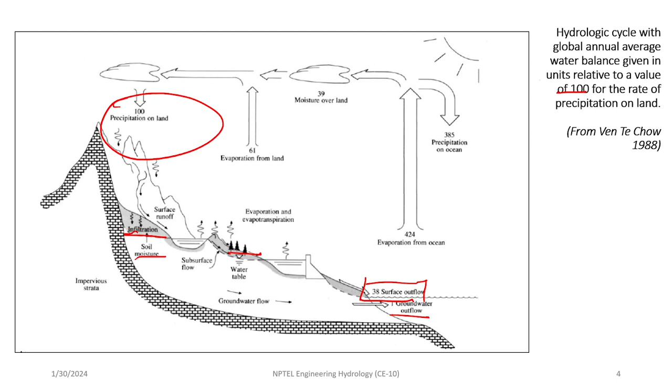Okay, fantastic. There is one more person I want to check, is he getting the things or not? I guess... Balamurgan, are you here? I think you are saying something, but your voice is not reaching me. You can type if it is possible. Okay, why is your voice not coming? I want to be more comfortable if we are interacting more. Not an issue if it is not working right now.

Okay, I'm coming back to my presentation again.

Ashish, can you tell me once again, is it visible to you? Screen is visible to you? Yes, yes, it's visible. Okay, okay.

So you told me that 61 units are going, which is getting evaporated. Yes. So evaporation is one important thing that we have to learn, that evaporation could be from a land surface, and another, it could be from the plants also. But when evaporation is taking place from the plants, then we come up with one more hydrological term known as transpiration.

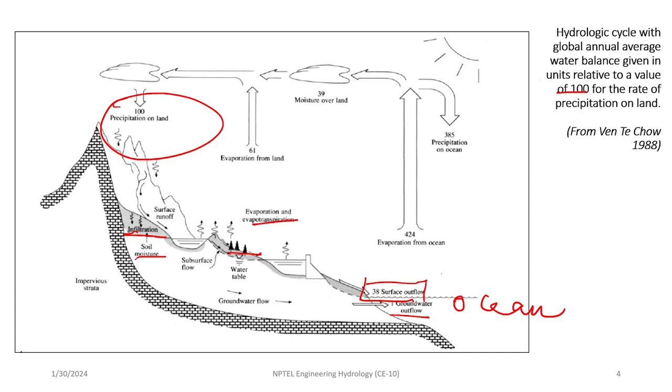These processes are very important in order to model the entire hydrologic system. Now I'm moving ahead, so one more tabular estimate is there. It is also from UNESCO 1978.

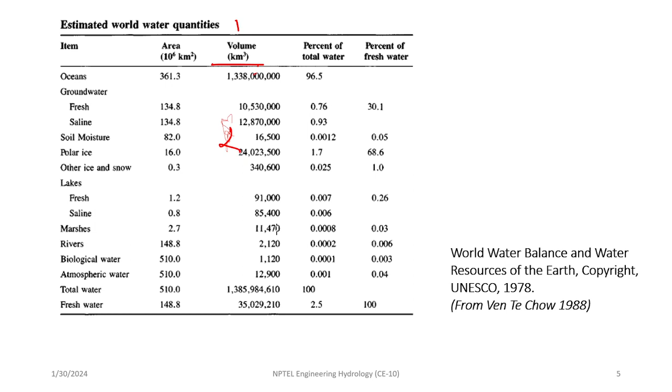So volume is having another importance in this. When we will be talking about residence time, we will be taking this volume as an input parameter for computing the residence time. I'm moving ahead. I hope you are getting the basic distribution. This is a basic understanding.

Now coming to the major part. In this entire discussion, we will be focusing on questions based on different topics, and simultaneously we will be discussing the basic literature and concepts behind this. So before going ahead, whatever question you are looking at, you should first reply to them, and then based on that we will go ahead.

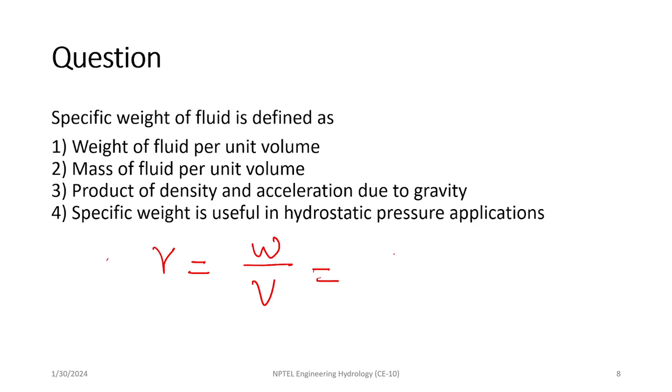So this is a basic understanding, you may have gone through the lectures already. A specific weight is represented by the gamma symbol. So gamma is equal to... it is saying that gamma is always a ratio of weight of the fluid per unit volume. Weight of the fluid, from basic physics, W is always equal to mg, so gamma equals mg divided by v.

If we take this m and v part together, we will come up with another term — can you tell me what it's called? It is called density, yes, mass density, we will say. So it is coming as rho, and the remaining part will be g. So weight of the fluid in the first option, you can see, weight of the fluid per unit volume. The mass of the fluid per unit volume will be density only, that is mass density. Then the third option: product of density and acceleration due to gravity.

One more thing is that specific weight is useful for hydrostatic pressure application. There is a principle that when water is moving, it causes some kind of pressure. You might have felt this when taking a dip in water, maybe a river or a sea. There is continuous pressure building, and this pressure always has a triangular distribution. It is always equal to P equal to unit weight, that is gamma into volume.

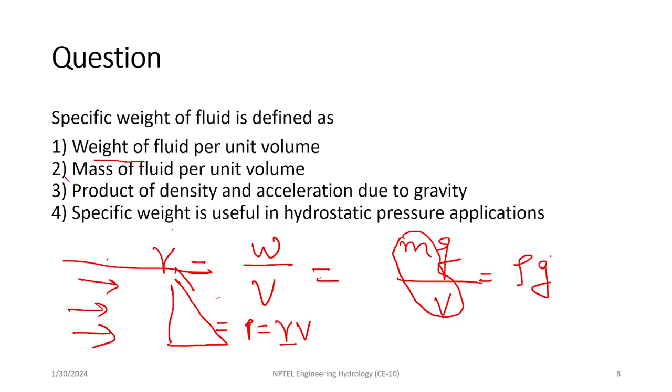So the first option is clear, the third option is clear, and the fourth option is clear, right? Okay, so whatever we had discussed so far, this is the basic difference between mass density and specific weight. You can see that mass per unit volume of fluid is defined as mass density of fluid.

The unit is clear, I think, not an issue. And for specific weight, we can see it is weight per unit volume, and the unit is somewhat different, Newton. Can you figure out why it is coming in Newton? Because gravity is acting, no? Yes, right, gravity is acting there, so it combinedly comes under this as a force.

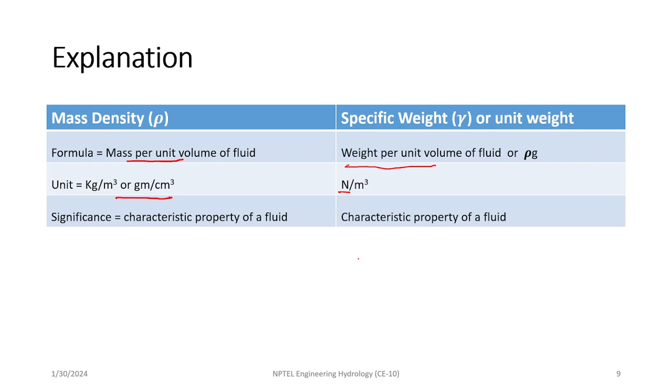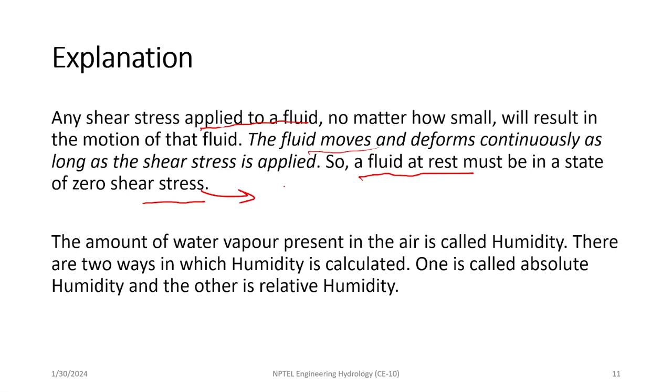What is shear stress? We have to note down that it is just a ratio of force per unit area, this is stress. And why is it called shear stress? It is because this force acts tangentially to a fluid or any body which is submerged inside it. Then only shear stress will act, so this force will be a tangential one.

The important thing is, when the fluid is at rest, it will have zero shear stress. Otherwise, if there is a small amount of stress applied, then definitely there will be some movement on the water or any other fluid, like oil or water, anything.

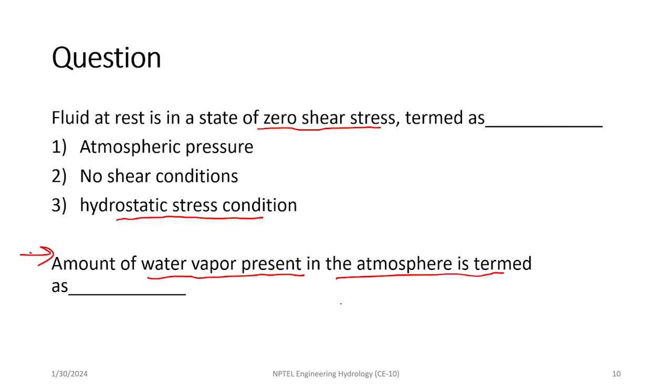Now coming to the second question: amount of water vapor present in the atmosphere is termed as? Any idea? Yeah, it's humidity. Fantastic, good one. So it's humidity, and this humidity is dependent on the temperature.

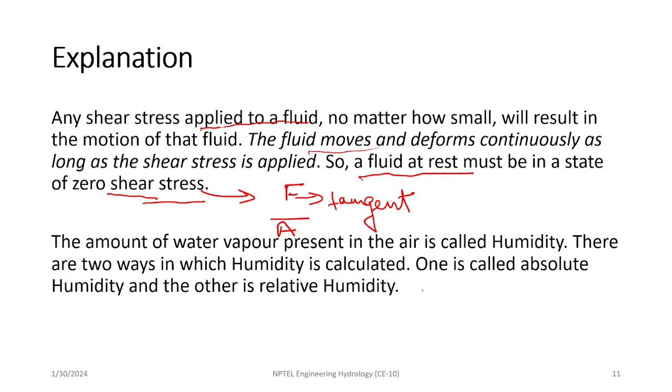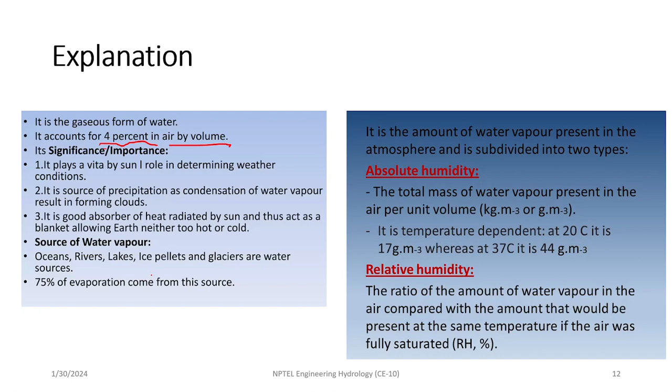Based on that, it can be divided into absolute humidity as well as relative humidity. There are some facts based on this: humidity always accounts for 4% in the air by volume. The major sources of humidity basically arise in terms of water vapor only, so 75% of it will be contributed from evaporation. Now coming to the next question, a different aspect of water across the earth.

This question - are you getting this? Different aspects of water across the earth can be explained with the help of a complex cycle, termed as... There should not be any confusion. Yes, water cycle. Good one. It should be a water cycle only.

Then another question is this. Let me erase this. Okay, other question is there: loss of water into the atmosphere through the leaves and the stem of the plant is termed as.

We just discussed - transpiration. Fantastic, good one. These are the basic concepts only. We are just going through the basic concepts. Later stage we will be going into the major questions, so don't feel that they are very silly. No issue.

So surface tension results from the forces, dash forces, within the liquid.

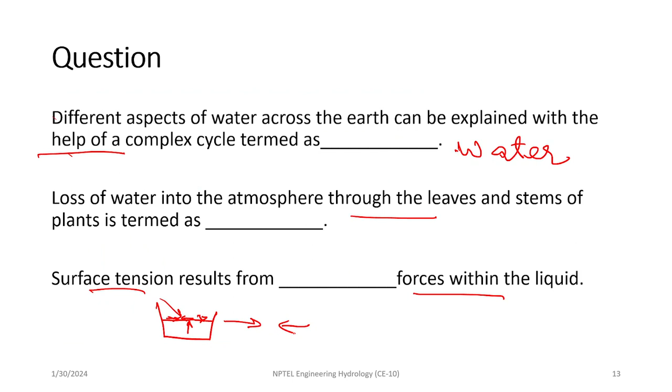It will be in vertical direction only, against the gravity. But we are talking about the horizontal force, acting on the horizontal surface of the water. So we can see the explanation for the above two questions. There is a water cycle - first one is the water cycle. Then there is a transpiration process.

Whatever water has been taken by the plants gets evaporated, known as the transpiration process. Now coming to the third question about surface tension: the surface tension of a liquid results from an imbalance of intermolecular attractive forces - the cohesive force between the molecules. You know about this cohesive force, cohesive and adhesive force.

Forces which are getting generated on this - this is an interface. We are talking about this force.

From this particular figure, you can see that there are certain water molecules which are already submerged. They are having a net force as 0, but whatever water molecules are at this interface, they are making a net downward force F. Because of that only there is surface tension acting on this surface. Got the point or not?

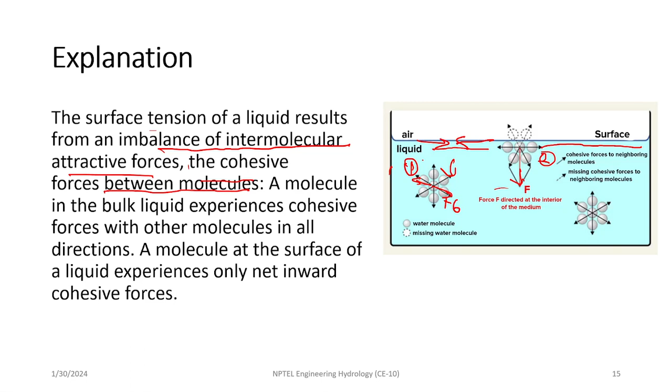Now the next question is: the process by which water changes into water vapor in the hydrosphere is evaporation. Fantastic, so it will be evaporation only.

Now the next question is: density of the fluid is defined as mass per volume. Good, fantastic. So mass of the fluid per unit volume - this will be the right answer.

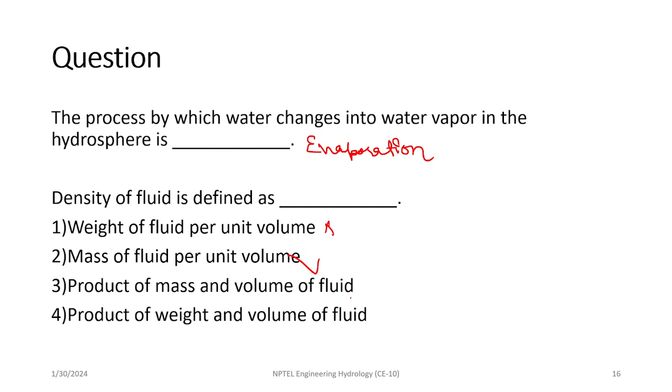You can also check whether the other options are right or wrong. The first one is wrong: weight of the fluid per unit volume. Product of mass and volume of the fluid - will it be density? No, no. And product of weight and volume of the fluid - no, no. Okay, good.

So the next question is: capillarity results from. Have you heard of this capillarity word? Yes. Where have you heard it? I've studied somewhere, I know this part. Fantastic, good, so definitely you might have studied it in some water-related part of your physics, maybe in 10th or 11th class. So definitely capillarity - anti-gravity, I think it's opposite to gravity.

Capillary action - exactly. So there are options: it arises from the combination of cohesion and adhesive forces, due to cohesive force only, due to adhesive force only, or maybe due to surface tension force. It's due to surface tension.

Okay, let's see the example. I guess it's not only surface tension - there are some other forces also acting, because surface tension can't define it properly. Capillarity, from my understanding, is always like the movement of water in the negative pressure direction. I can tell you an example: whenever plant roots take water, they take it through capillary action only, and that process is basically explained in terms of negative pressure acting, based on which they carry water from soil moisture to their roots or shoots.

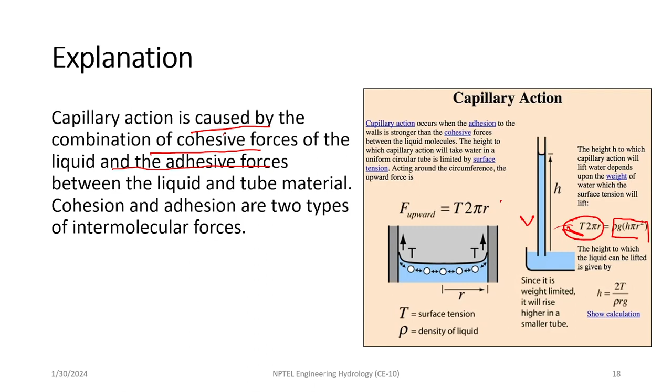Shall we move ahead? Yes, very good, okay. Now I guess one hour is already completed, but if you're not tired we can continue. We're comfortable. I want to know the other person. Sure, wait a minute.

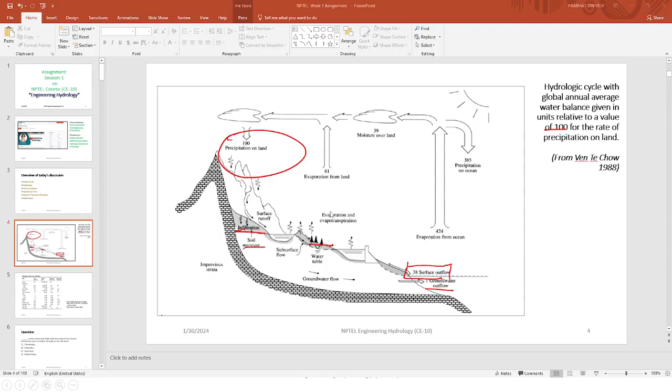Okay, he is replying. Sorry, Bala Murugan. Whenever the screen is in a presentable mode, I can't see the messages. Okay, that's fantastic that you are replying. Good to know.

Maybe this is the first session, so only two people are here with me. But definitely, as we go into detail with further concepts, we will have more fun and it will be more interesting to know the concepts. I hope next week when we meet, more people will be there. As far as I went through the website, I saw only maybe 21 people are enrolled right now. Oh sorry, they have opted for exam, I guess. So maybe that's the reason, or maybe another session is going to be there, after 7. So because of that also.

Okay, so I am now continuing. So the question is: the time taken by a particle of water to pass through a phase of water of the hydrological cycle is known as residence time. So it is asking about the residence time. Yeah, average time, okay, that is the average time. Fantastic, good one. So average time is the answer.

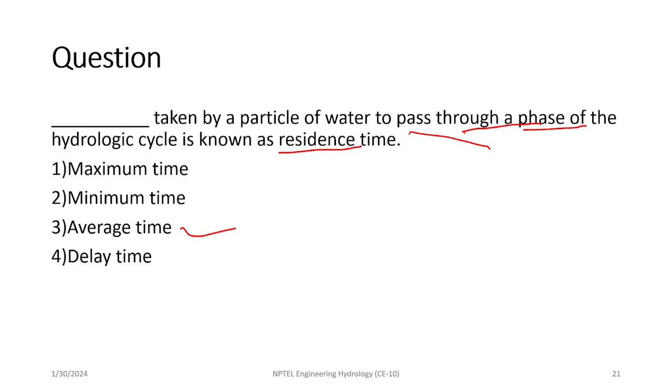Let's see its description in detail. So the residence time, TR, is the average duration for the water molecule to pass through a subsystem. Can you define the subsystem of the hydrological cycle? Can you name one of the subsystems of the hydrological cycle?

Just like water, surface water, river water, atmosphere. Yes, so basically a subsystem is representing a process.

So the basic significance of residence time is that you get an idea of the time, by how much time the water present at the ocean gets evaporated and converted to other hydrological processes.

Like if it is having a surface runoff, consider one particle. If there is a river, there is one particle, I am taking this particle as this. Now whatever process is dominating in this river is called surface runoff. So surface runoff is one dominating process in the river. Now there is one particle present here.

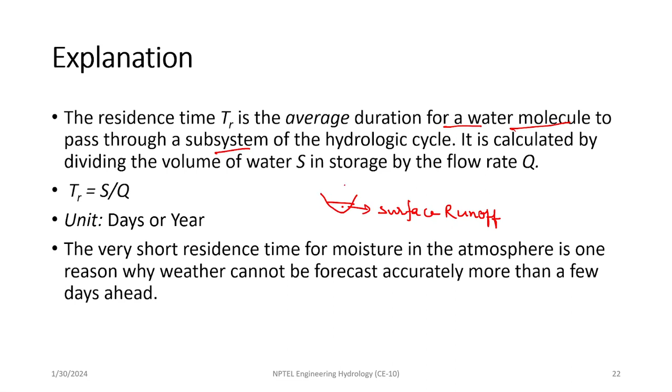Now, how much time will it take if the next process, say evaporation, is happening? So this is an evaporation process. So by how much time will this particle reach up to this particular process, evaporation, and entirely change to water vapor? How much time it will take, we can understand from the residence time.

Got it? So how is it computed? It is a ratio of the volume of water that is stored divided by the flow rate. The flow rate could be whatever runoff finally gets into the ocean, or groundwater finally getting into the ocean, or it could be in terms of precipitation also, because precipitation can also be taken from ocean as well as land.

Now one more important thing to note is that this residence time will be computed in units of days or maybe years also. Now this particular point that is mentioned here, I will discuss later after attempting one numerical on this. Okay, so this numerical is like this.

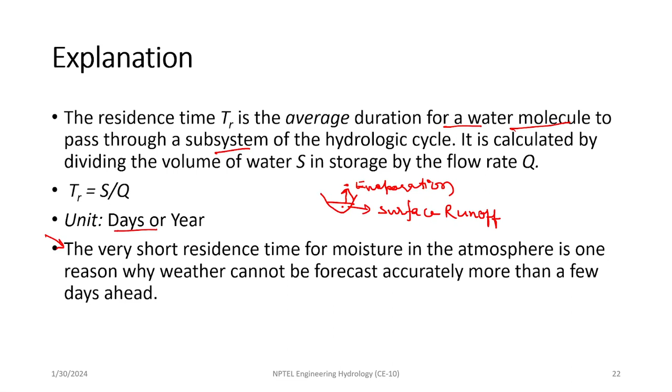Take your pen and try to figure this out. As per my observation, you might have some kind of tabular understanding from the lectures. Have you got any table related to residence time or something? We don't have any table, but we have one question related to this. Okay, so it may be in your assignments, right? No, it's in the lecture. We have one question regarding this, but we don't have any table regarding it.

Okay, have you been able to get the answer? Yes, it's 8.2 days. Fantastic, good one. So 8.2 days. Now we will look from scratch at how 8.2 days is coming in this. So the first thing I want to know is what is the formula for computing the residence time.

The volume of water in phase relative to the average flow rate in that phase. Yes, fantastic. So storage, whatever water is getting stored, divided by the flow rate.

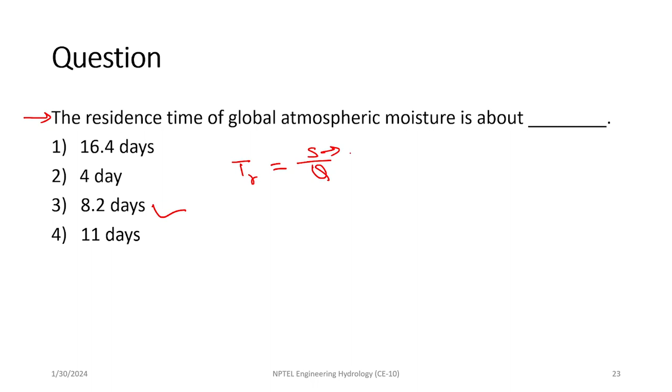This particular storage term will be having units in terms of volume. So unit will be in terms of volume, and for the flow rate, in general terms, we can take volume in the units of kilometer cube, and for the flow rate, we will take it as kilometer cube per unit year. We will be taking like this.

Wait a minute. Why is it not kilometer cube divided by year? Sorry, year. Now, once the kilometer cube gets cancelled out, we are definitely getting a unit of year. So unit will be in year.

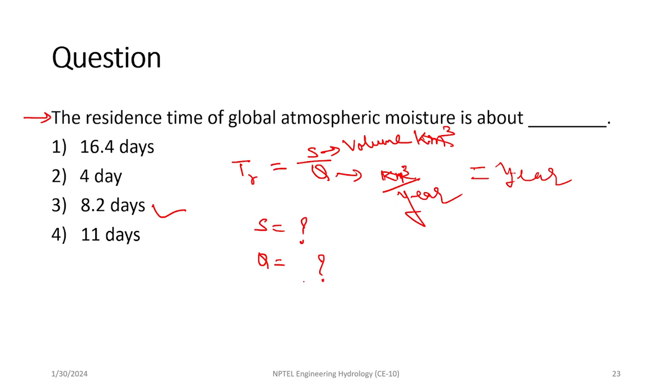Now we will first look into the tables to see how we get the value of S. Firstly we have to determine the value of S, then parallelly we also have to look into the values for computing the flow rate. Let's see in the next slide.

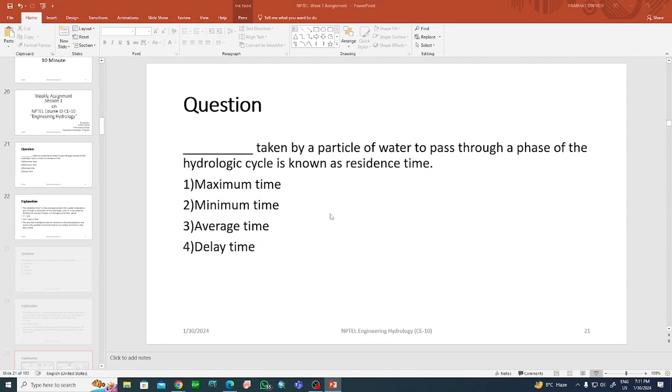8.2 days, fantastic, Bala Murugan. Good. Whether I am pronouncing your name correctly or not, if not then I am really sorry for that. Bala Murugan, I guess. Murugan.

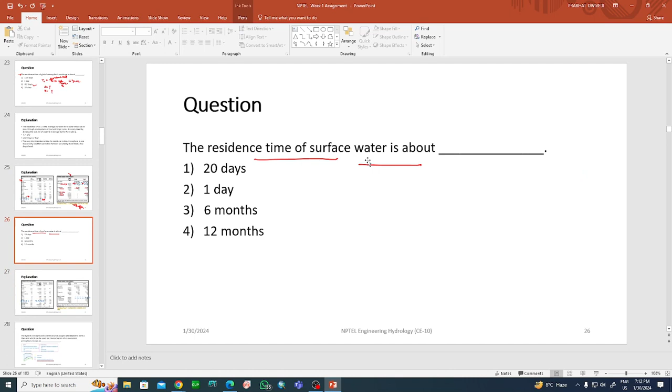I was just checking whether it was a surface runoff process, because in surface runoff then only you have to take the value for river only. Yes, but you are right that we are searching for surface water only, so you have to add the lakes also.

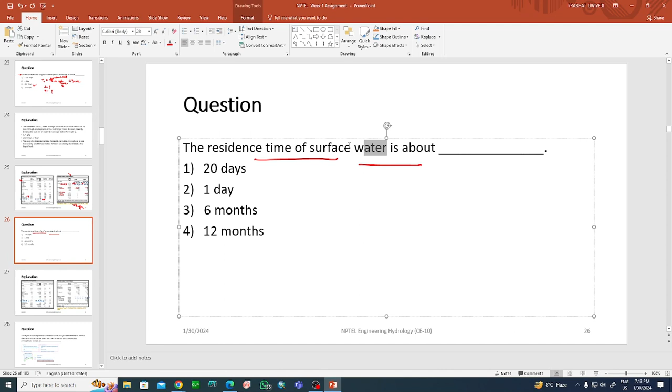Ashish, yes, I guess it will be surface water as surface runoff only. Okay, you have to focus on this surface water as surface runoff, because for this question we consider only rivers in this, right? Rivers, yes yes yes, right right. Because surface runoff will be dominant in the rivers only.

It's 17 days, I think. 17.3, okay, 17.3 days, okay. So what are you doing? Average water flow in that day, how much volume have you taken? What is the value? 2120.

Which one? One minute. I have taken 2120. Fantastic, so you have taken 2120, and what is the other value you have taken? Q: 44700. Fantastic, so what value are you getting? Division of that: 2120 divided by 44700, I'm getting 0.0474. Then multiply by 365, we got 17.3.

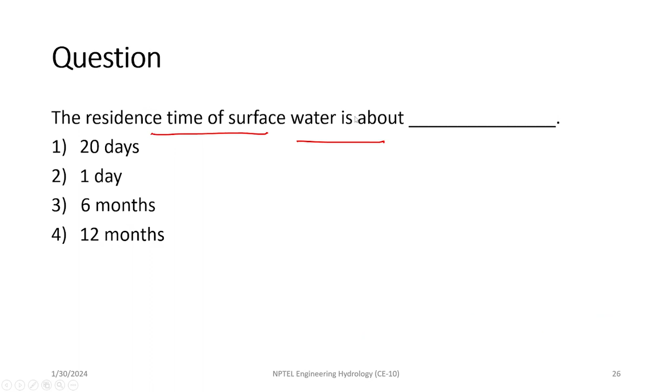Okay, fantastic. So we were having options like definitely it is asking for days, yes it will be 20 days approximately. Yes, you are right.

Okay, let me see whether Balamurugan applied or not. Okay, I guess he is still solving.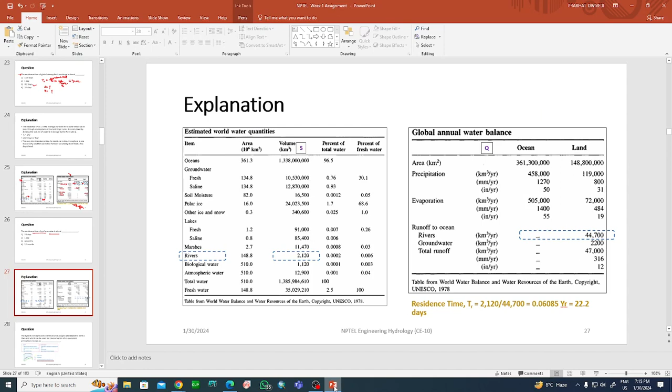I can ask him to answer. Okay, we are moving ahead.

The next question is... we have completed the basic problems associated with the residence time in the hydrologic system. Now we are jumping into the Reynolds Transport Theorem concept. The first question is: the system concept and the control volume analysis are related to form a theorem which can be used for the derivation of conservation principles. This is known as RTT.

What you have to first understand is why we need RTT. RTT is a fundamental mechanism for modeling the dominating hydrological processes. If we are modeling a hydrological process, you should think about the point that in every hydrological process, water molecules or fluid particles are present. If water is moving, it will have particles, and definitely whatever the particles are doing, like whether the particle is moving along the flow, or it may be getting turbulent.

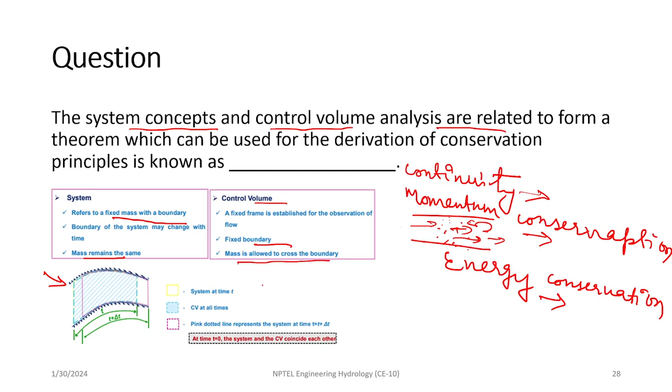Now the second one is control volume. The control volume means we are having a fixed boundary. The boundary is not going to change - it will remain there for our period of simulation, our period of target. It will be the same only. But we are saying that mass is allowed to cross the boundary.

One more thing I want to add is that there is an alternative name for RTT - it is known as the Control Volume Theorem. This may be asked as another question. So this is basically dealing with developing continuity, and another one is momentum as well as the energy equation. Why do we need this? In order to model the distribution of various hydrological processes occurring in the water cycle system. Got it? Got it. Okay.

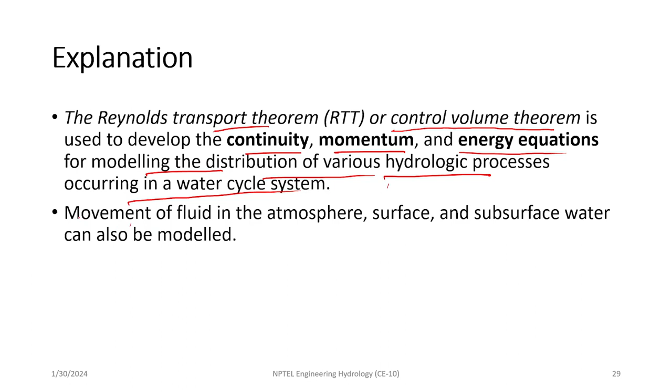One more thing I want to add is that the movement of fluid in the atmosphere, surface, and subsurface water can also be modeled in this. As I mentioned in the previous diagram, if hydrological processes are changing, whatever fluid particles are there basically get changed, or change from one location to the other. In that sense it will be spatial, or maybe with time it is also changing, so we will use the word temporal.

So if the things are changing with time, a temporal word will come into the picture, and if it is changing with space, then spatiality will be counted in this.

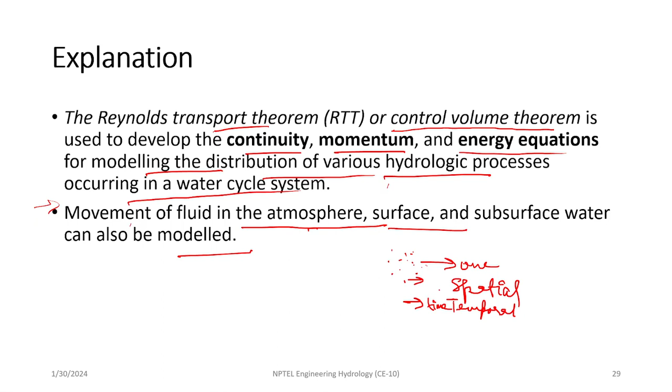Now the next question is related to the Reynolds Transport Theorem only. As you may know, Reynolds Transport Theorem may have been derived in your lectures, so you have gone through that. Now the question is asking what the second term of Reynolds Transport Theorem is related to.

It is the first option. Second is time rate of change of intensive property across the control surface. Second, time rate of change of extensive property, intensive, stored within the control.

I want to tell you that kindly see that it should be divided in terms of term 1 or term 2. It is written in that sense.

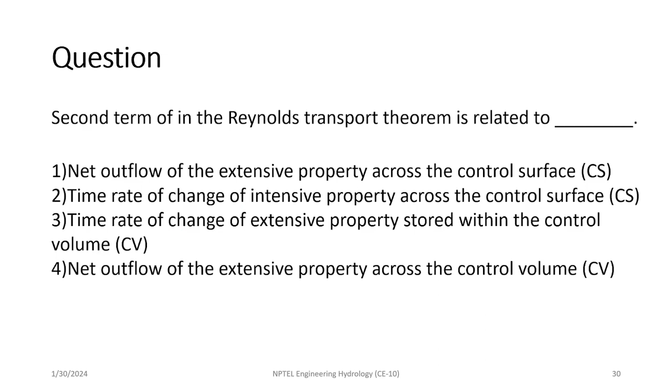Okay, let's see. We will see what is the answer for that.

So here, you might be knowing this picture, right, how the fluid mass is transferring with time. Now RTT, as you know, relates to dB by dt.

So dB by dt is what? Can you tell? Time rate of change of intensive property - it is extensive, I guess it should be extensive property, right?

So it will be extensive property due to the external causes producing this change. External causes - what could they be? It might be friction, surface friction, it might be there. It might be due to any kind of stress that is happening. So this could be an external cause.

Now you can see this particular expression below, dB by dt of the entire system. It can be written in two terms, term 1 and term 2. Whatever you are saying about time rate of change, it will be denoted in this way, this term 1.

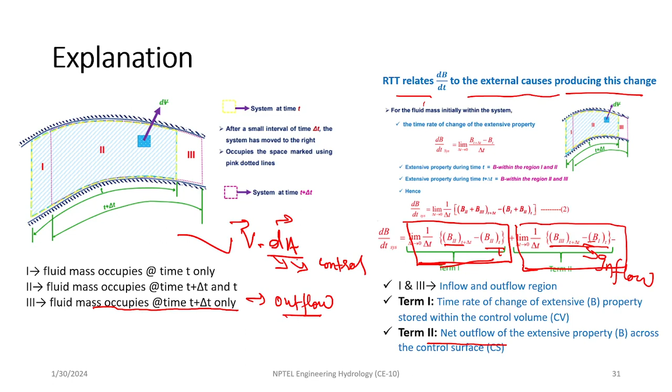Now the next question again comes. It is related to this only, that whenever we are using the Reynolds Transport Theorem, and if we are trying to get inflow in the negative direction, then what should be the degree, what should be theta? Theta between 90 degree to 270 degree.

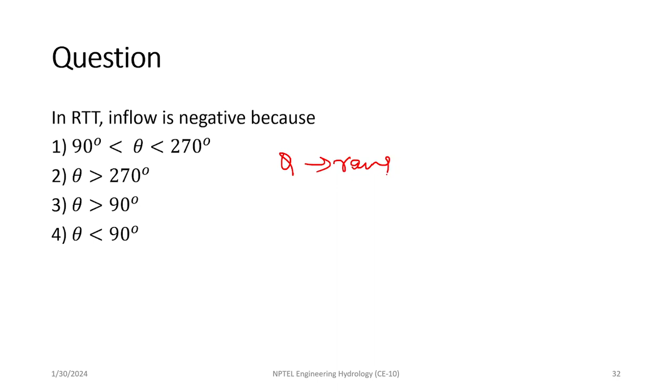Fantastic, good one. But still we have to see the explanation of how it is coming. Okay Ashish, just as I was saying, you can see here this is the RTT theorem, the entire final RTT theorem, saying dB by dt in the system, and how term 1 and term 2 are showing. This is term 2, representing net outflow, and this is term 1, representing that the extensive property is changing with time. Got it or not? Got it.

Okay, fantastic. For your further information, this dB by dt that we are considering has a Lagrangian approach kind of selection in this. Then the Eulerian approach is also counted for in order to capture the control volume. So this is there. Now if we are targeting the inflow direction, firstly we have to look into this part, V dot dA, how we are describing this.

So in the second term you can see this one. Ashish, can you see this? Yes, V dot dA. So from our basics, like from class 11th or 12th, we know that whenever the dot product is opened, it becomes V into dA into cos theta.

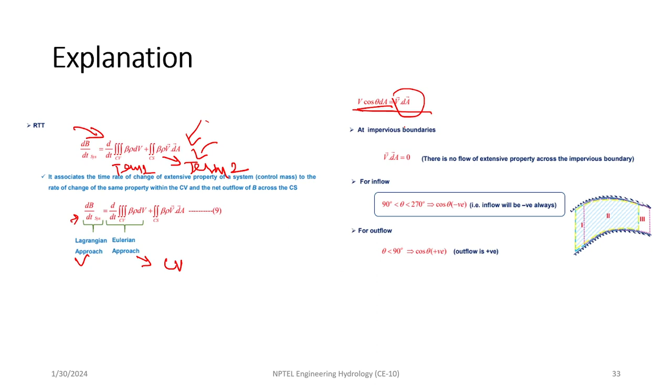We'll take it like this only. And what is dA? If we are having a kind of fluid and it is having a velocity in this direction, it will also be having a cross section, and let's say its cross section is normal to the cross section, it has a vector of dA. Whatever angle theta it is forming here, this theta represents that only. Got it or not?

Okay, so this theta, if you are taking it between 90 to 270, it will come in the negative direction. Cos theta value will come out negative, and because of that we will be counting the flow, inflow, in the opposite direction. It is in the negative direction, right?

Now the further question is that the left hand side of the Reynolds Transport Theorem for the mass conservation principle, in the case of single phase flow, is? It's one, I think. Which one? One.

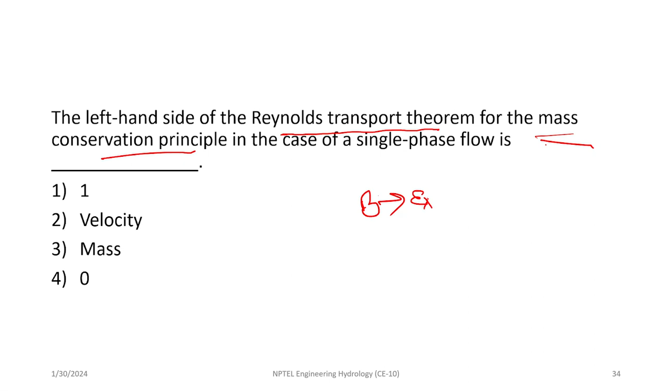See it carefully. Firstly, read. As you can see, RTT is constant. Now what are we deriving here? We are deriving the mass conservation principle. So what will be the extensive property in this? What will be the B value? B is equal to extensive property. If we are taking mass, then definitely what will B be?

You can tell me, so B is equal to M when we are taking mass. Yes, fantastic. B equal to M, and then if we are trying to focus on computing small beta, this is capital dB by dM. Yes, dm. Then it will be defining an intensive property, right? And this dM by dM, it will come out to be 1, right? Yeah, and you have to remember one more thing, that we have to compute in the left hand side the value of d capital B upon dt, right?

Okay, so what is the question asking? You can see there, the left hand side, it is asking about the left hand side parameter, the value of left hand side. So the left hand side value will be dB by dt only, right? You can see this equation, you can see. I'm just erasing this. You can see here. Ashish? Yeah, I can see. You can see here. Wait a minute. So this one, dB by dt, we want this value. Got it?

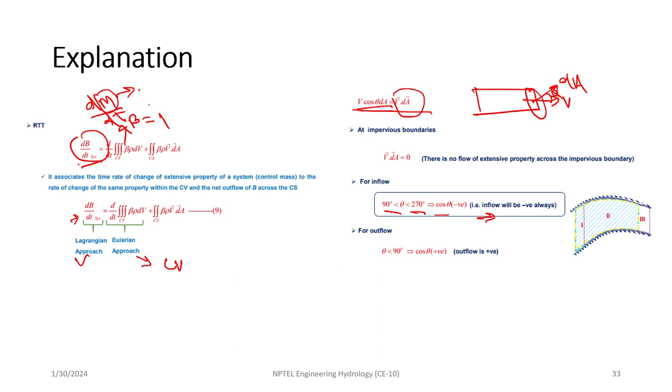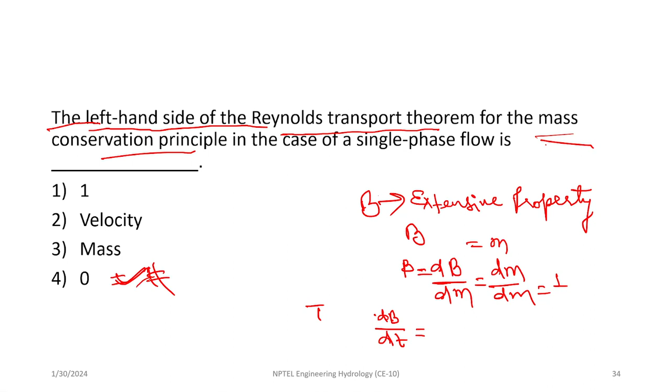And this beta value we have already calculated. Beta value is coming 1. But still we want to calculate dB by dt. So here if we are taking m value, it will be dm by dt, right? And you know that m will always be constant. Assumption, do you remember the assumption? There is no change in mass. Whatever is entering is getting out. Yes, fantastic, good one. So dm by dt will always be equal to 0. Differentiation will be 0. So now you can get the answer that it will be only this one, right? 0. Good or not? Yeah, I got it.

You can see the explanation here again. They have calculated beta equal to 1. Then again, by the law of conservation of mass, we know that mass can't be lost. So definitely it is getting constant. So dm by dt will be getting a value equivalent to 0, right? Yeah, and now you can see the surprising thing that I just mentioned.

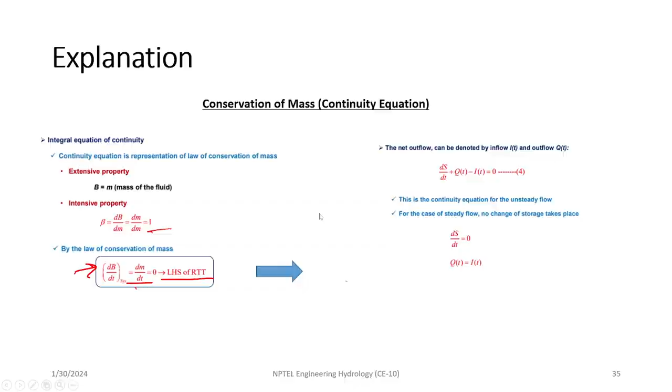I guess someone is getting inside this. Let me see. Okay.

Ashish, you can see the results that whatever things we are deriving, it is finally giving us a continuity equation. Can you say the name of this continuity equation? It is an unsteady flow continuity equation, right? Why is it unsteady flow? Because it is changing with time. If I choose that storage is not changing with time, it is getting constant. So you can see that finally dS by dt, again the differentiation of this, is getting a value of 0. And once it is getting 0, we can see that whatever inflow is coming, it is finally getting as an outflow, right? So this is the result of this. Whatever the RTT theorem we are applying, taking M as an extensive property, finally we are getting the conservation of mass like this, and we are getting the continuity equation.

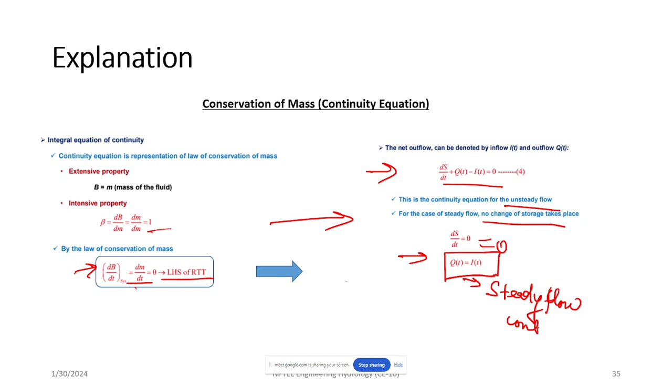This is for the steady flow. Steady flow. This is the steady flow continuity equation.

Okay, I'm moving ahead. Now the next question is, read it properly again. Left hand side of the RTT for the momentum conservation principle is, it is asking. So now you have to notice the one thing, that momentum conservation is asking again. So can net force solve it? Net force. What? Net force. Yes, fantastic, good one. Yeah, it will be a net force only. Net force. How are you getting this? Can you tell me?

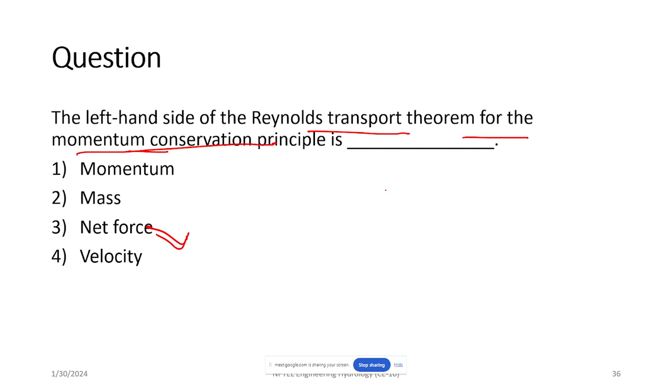Because dB by dt, we have to compute this dV by dt. We have to compute. So what B value are you taking? B is equal to mass into velocity. Momentum, if we talk about momentum, then yes, this is the B value. What B value are you taking? That will be M into V, right? Yes, m into v, mass into velocity. Okay, fantastic. So it will be d(mV) upon dt. Now you know that m is constant, so it will be dV by dt. Ultimately it is giving us net force only, based on the law of conservation of momentum.

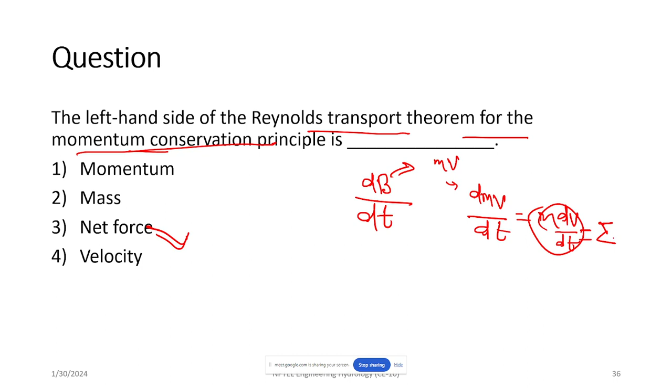Okay, Newton's second law, do you remember this? Newton's second law says that net force acting on a body will be equivalent to rate of change of momentum. So it will be coming as summation of F.

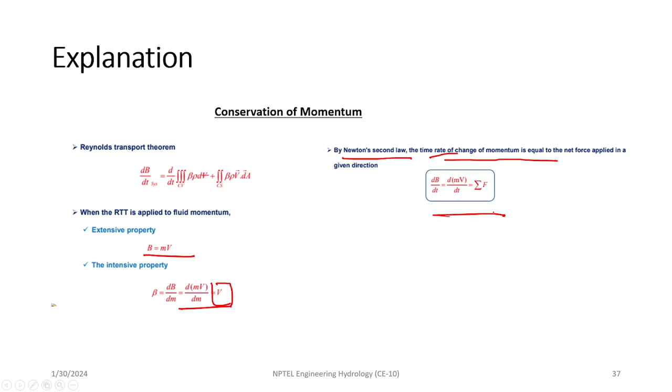Now you can see it, that yes, B is taking mv, then again we are getting a beta value of v, but it has no use right now because we are concerned with the left hand side. Now based on Newton's second law, we can see that this time rate of change of momentum is equal to the net force applied in a particular direction. So we are getting the summation, net force.

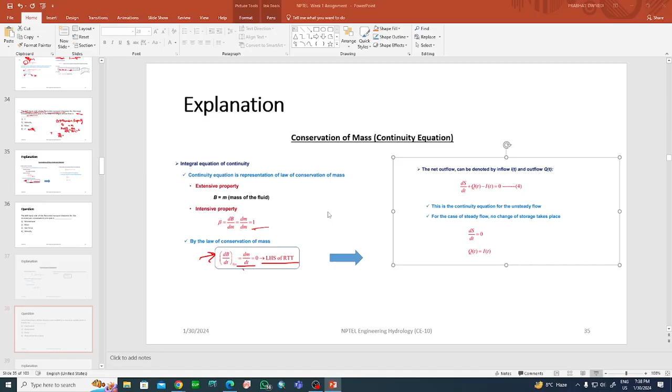I want to know what other person is replying also. Let me see. Okay, fantastic, good. Bala Murugan, you are replying, fantastic, nice to see you. Good, keep on.

I think Bala Murugan, you have to see other points also, like apart from the catchment, there may be other points also. Watershed, I think watershed is the answer. Watershed is the answer, good one. Anything else? Because it is not a single answer, it may be having more than one also.

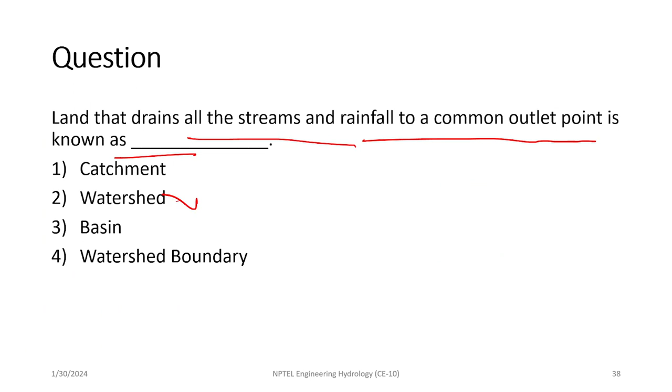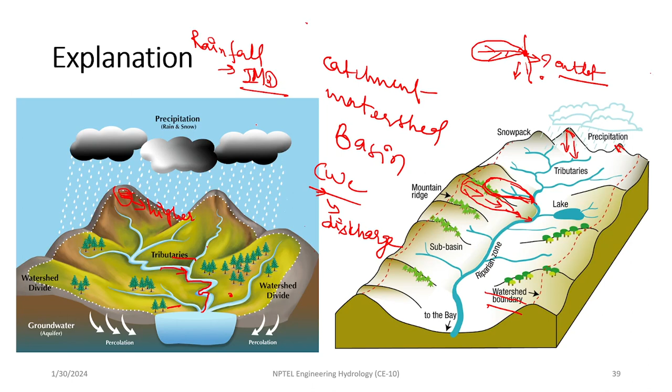So for groundwater there will be two things. Either it will be associated to the water quality, so definitely water quality will be given by some other agency. There is CPCB, you might be knowing this agency, Central Pollution Control Board, yes, they are providing water quality related data. Then again CGWB, Central Groundwater Board, they are providing groundwater information, right?

As our discussion will go on, we will keep discussing the data dissemination agencies, so that you will be more having exposure for those data also, that whatever we are studying should be relevant and significant to ourselves, so that we can process this data for our major understanding.

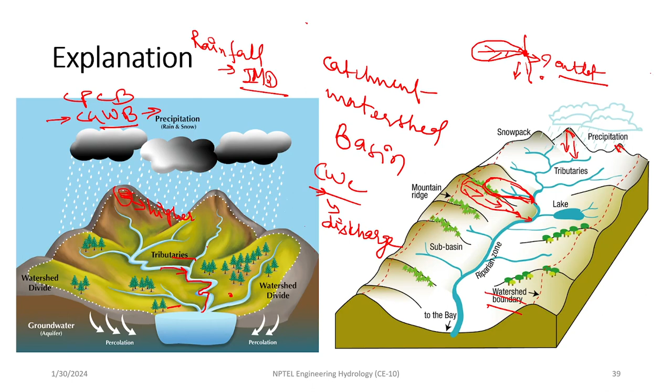Now the next question comes, is that in controlled volume or Eulerian approach, what could be the possible options that will take place?

Can you answer? In control volume... So it is asking about controlled volume. That is control, Eulerian volume approach.

Mass. Keep in mind that yes, mass transfer can take place across the control volume. Fantastic, that is a good one. But still, multiple options can be there, so you have to see again, because whatever things are there have already been taught in the lectures, so the questions have been taken based on that.

So if you are talking about the Eulerian approach, definitely it will be having a control volume, and when the control volume is taking place, then definitely the boundary will be constant and fixed. Space will be specified. We should know that these rigid boundaries are not going to change, it will remain the same. And then again, the particle phase as a continuum will be taking place. We are considering a continuous movement of the particles in this control volume, they are not getting lost, and mass transfer can take place across a control volume.

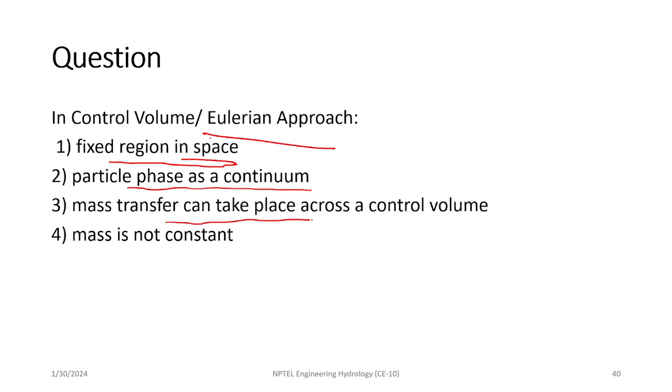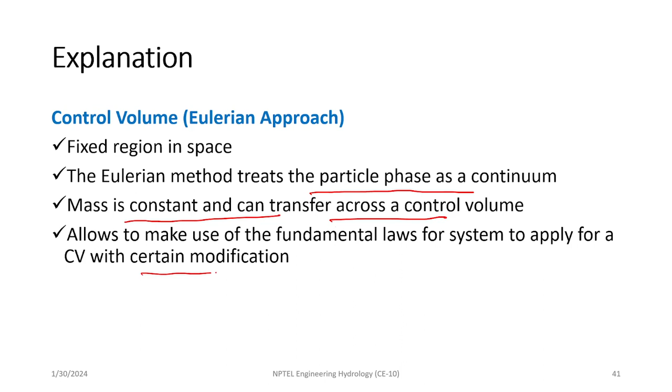So this is the explanation: control volume is a fixed region in space, the Eulerian method treats the particle phase as a continuum, the mass is constant and can transfer across the control volume, and whatever fundamental laws are there can be implemented in the RTT.

Now the next approach, the Lagrangian approach, that is related to the control mass, or we can say it as a system.

So Ashish, can you let me know the control mass?

Particles are discrete. First, second is correct, good one. Fixed mass within the boundary, yes, good, mass will be fixed only. Then mass transfer is not allowed, yes, mass will not be allowed to transfer, of course, because we are considering the control mass now. We are not saying that mass will be transferred to other forms of energy. So this is the case.

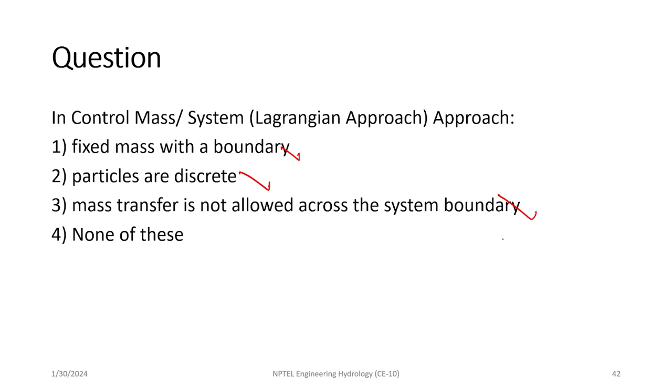So in our explanation we can see that for control mass, or system, the Lagrangian approach, a system is a collection of matter having fixed identity. So here a fixed mass within a boundary, and it is considering particles as discrete, and there is no mass transfer across the system boundary.

These are already in the course, you might have seen these slides. They are basically associated with the processes used in deriving the Reynolds Transport Theorem, which has significance in understanding the conservation principles, mainly momentum, continuity equation, and energy conservation.